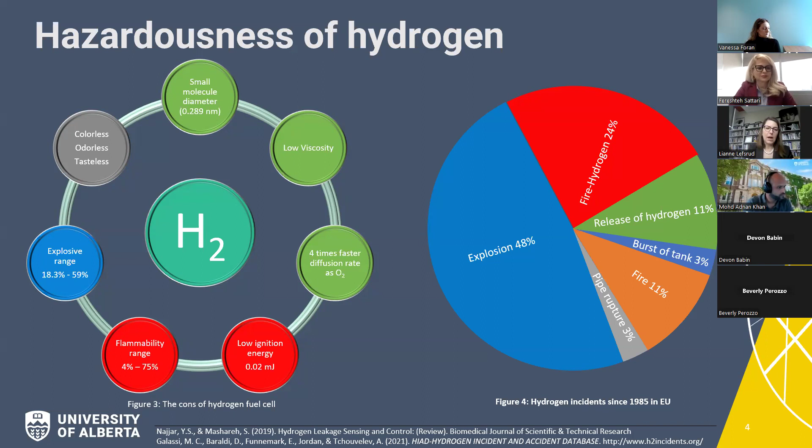As a result of this, figure 4 on the right-hand side shows there's been a number of hydrogen incidents in the EU since 1985: primarily explosion at 48%, fire at 24%, release at 11%, burst of a tank at 3%, and then also pipe rupture and regular fires. So it's highly hazardous, and as a result has led to a series of incidents. Next slide, please.

So what we'd like to talk about today is our approach generally, which is to look at the CSA Standards Council of Canada, identify the gaps, but how can we prioritize those gaps? Primarily, it's to look at the safety, process safety issues with regards to hydrogen, using a quantitative risk assessment for specific use case scenarios to determine where those gaps exist, and compare against municipalities' codes and standards versus other jurisdictions - California, Japan, other places where they've been using hydrogen for a number of years in a way that is safe and effective - so that we can enshrine a safety-first approach in Alberta.

We'll talk about hydrogen refueling stations as our first use case example, and we'll talk about some next steps. Next slide, please.

Okay, so what we did is basically follow the molecule to analyze these use cases, looking very much at the full hydrogen value chain. In this Alberta Innovates funded research, we have basically 5 milestones or sub-projects that we're looking at.

The first is hydrogen vehicle fueling and servicing, in which Anirudha will show our approach. Number 2 is transportation, primarily on roads and pipelines, which is also the third milestone. We're also going to look at microgeneration, and then lastly, end use in various residential, commercial, heavy equipment, and power generation.

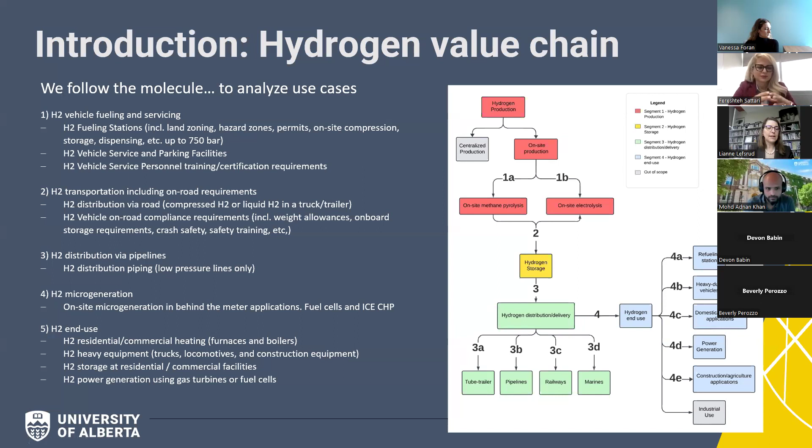Okay, next slide, please. Now I'll pass it over to Dr. Fereshteh Sattari, and she'll talk about our first use case in hydrogen refueling stations. Yes, thank you, Dr. Lianne. First, I want to thank everybody for taking the time and joining us.

Now I'm talking about the motivation behind this research. To support the transition to hydrogen-powered heavy-duty vehicles, the government of Alberta has called for expressions of interest from stakeholders and local parties willing to own and operate hydrogen refueling stations in the province. The expected station capacity is around 2 tons of hydrogen per day, primarily focusing on serving heavy-duty vehicles. However, these stations may also have future provisions for fueling light-duty hydrogen vehicles. To facilitate the deployment of hydrogen-powered heavy-duty vehicles, it is crucial to establish a robust hydrogen refueling network across the province. Next slide, please.

While deploying hydrogen refueling stations offers environmental benefits, several obstacles impede their facilitation in Alberta. These obstacles stem from various safety concerns regarding using hydrogen as a fuel, gaps in local zoning laws, Canadian codes and standards, and the process for permitting and approval considering these safety concerns. Additionally, most quantitative risk assessments performed for hydrogen refueling stations assume a uniform leak size distribution throughout the facility, which can lead to an over or underestimation of required separation distances.

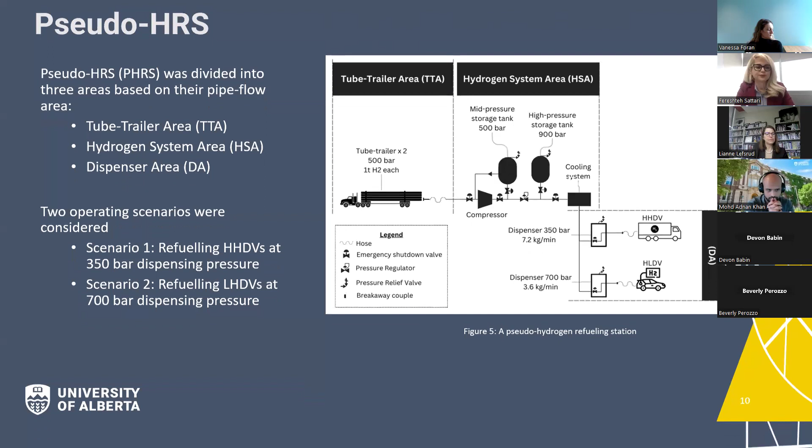Now let's talk about the facility description. This slide provides a detailed description of the equipment, pressures, and hydrogen inventories considered in these two operating scenarios for the modeled pseudo HRS. In scenario 1, for refueling heavy-duty vehicles at 350 bar, the facility included two tube trailers with a pressure of 500 bar and an inventory of 1,000 kg each, a compressor operating at 520 bar, a medium pressure storage tank at 520 bar with a 500 kg inventory, and a dispenser at 350 bar.

In scenario 2, for refueling light-duty vehicles at 700 bar, the facility had the same two tube trailers with a pressure of 500 bar and an inventory of 1,000 kg each. However, the compressor operated at a higher pressure of 900 bar, and there was a high pressure storage tank at 900 bar with a 1,000 kg inventory. The dispenser in this scenario was rated for 700 bar.

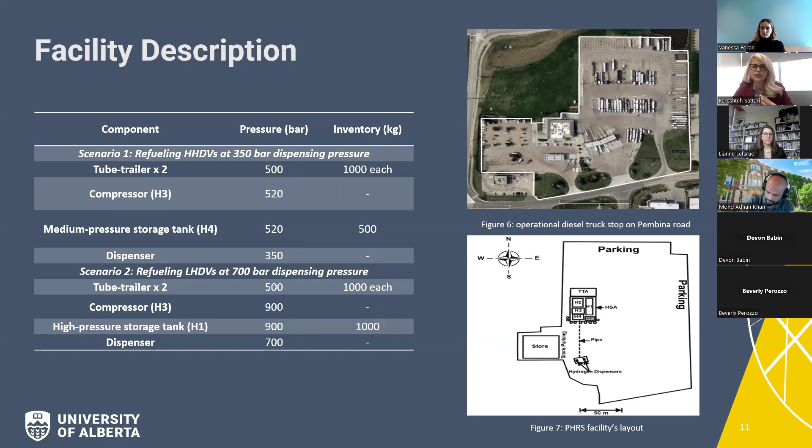Now let's talk about the methodology that we took for this research.

The quantitative risk assessment methodology followed in this study was based on the conventional approach outlined in the Purple Book, integrated with the risk-informed method of evaluating separation distances as described in the work done by Sandia National Lab and NFPA. For each area in PHRS, namely the tube trailer area, the hydrogen system area, and dispenser area, individual equipment failure frequencies were calculated using HyRAM tool.

A bow tie analysis was then conducted to evaluate the frequency of leak occurrence, followed by an assessment for the potential consequences of these leaks.

A risk matrix following the guidelines provided by the Center for Chemical Process Safety, or CCPS, was developed to assess the severity of the consequences. This matrix categorized a risk as intolerable, not desirable, conditionally acceptable with controls, or tolerable based on the frequency and consequence severity.

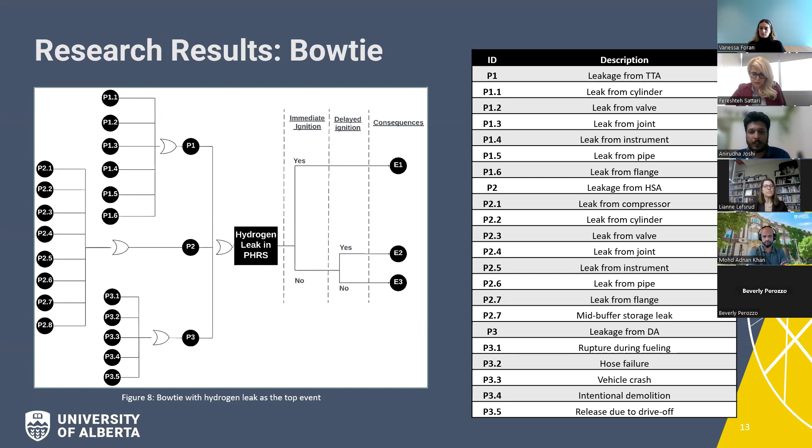Similarly, if there's a delayed ignition in the process, the consequence can be a flash fire. And in any situation, if there's no ignition at all, the consequence can be a safe dispersion, meaning the hydrogen has diluted and there's no probability of ignition in such events.

Next slide, please. Based upon these bow ties, we calculated what can be the frequency of occurrence of hydrogen leak in such situations. As Dr. Sattari said, we moved away from the assumption of uniform leak sizing throughout the refilling station. So we looked at different leak sizes at different areas based upon their pipe flow areas associated to each area.

We have 0.1%, 1%, 10%, and 100% leak sizes, relative to the pipe flow area associated with each component of the refilling station. Based upon these leak sizes, we evaluated the frequency of that top event occurring, the frequency of consequence E1, that is jet fire, consequence E2, flash fire, and consequence E3, that is safe dispersion.

Based upon this, we could see that the annual frequency of occurrence for a leak size of 1% and 10% had a relatively smaller difference of just 0.02. This is very considerable, because if we consider a 1% leak size, which is smaller compared to 10% and 100%, then we'd be underestimating the harm caused by a 10% leak size. For example, a 1% leak size is around 0.62 mm, whereas a 10% leak size is around 3 mm, and the 3 mm leak hole can generate higher harm distances compared to the smaller size.

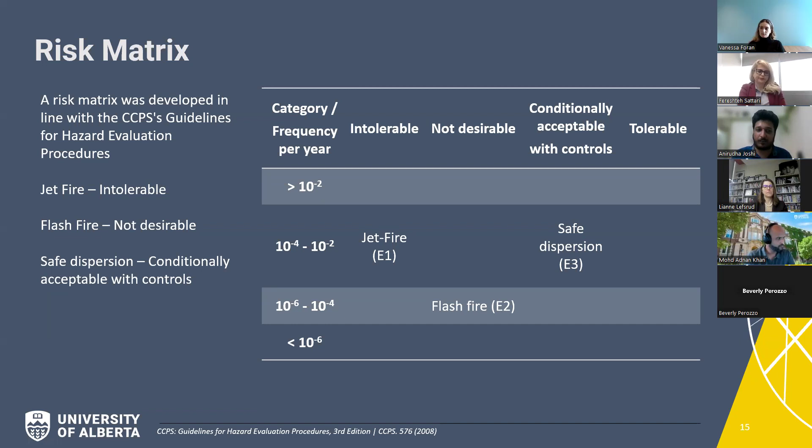Based upon this risk matrix and the different leak sizes evaluated, we had to set certain harm and risk criteria so we could estimate distances based on threshold levels. In cases with ignition, we look at thermal radiation levels developed. The primary one is 1.6 kilowatt per meter square, and at this thermal radiation level there's generally no harm even for longer exposures.

But at the 4.7 kilowatt per meter square thermal radiation level, if any individual is exposed for about 20 seconds, that human can experience first degree burns. Similarly, at a higher radiation of 25 kilowatt per meter square, a human can experience significant injury in just 10 seconds and even 100% lethality in a minute. Looking at these thermal levels, we concluded that 4.7 kilowatt per meter square is the particular threshold we need to look at, because that provides a 20-second escape time as well.

So any human beyond this will be in the thermal radiation range from 1.6 to 4.7, which is considered less harmful or at a stage no harmful. Therefore 4.7 kilowatt per meter square was our ideal threshold value to consider as the criteria.

Apart from the thermal radiation level, if there's no ignition, the hydrogen will keep accumulating and the concentration can reach about 4 volume %, which is the lower flammability limit of hydrogen. Even in this case, if an ignition source is present, it can ignite and result in flash fire due to delayed ignition. So we set these two boundary conditions to determine at what distances humans are going to be safe: the first is 4.7 kilowatt per meter square, and the second is the LFL concentration. Whichever generated the higher distances, we considered those as the separation distances.

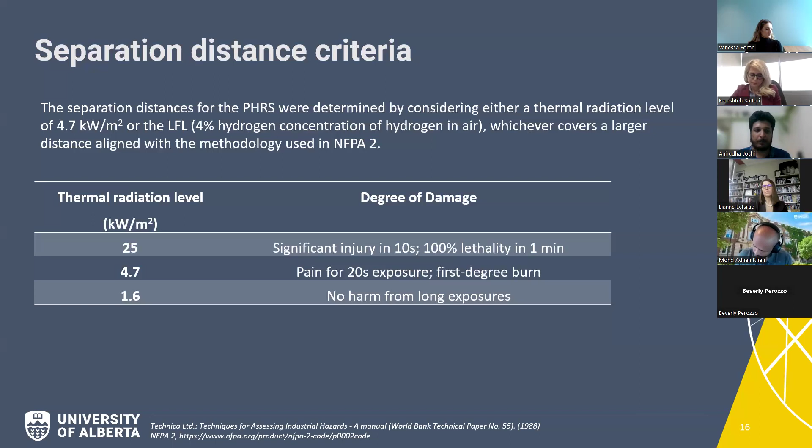Okay, so now we have the frequency part understood already. Now let's talk about the consequences that these leaks have. So as Dr. Sattari described, we have two scenarios.

Scenario 1 talks about the 350 bar refueling station wherein we are refueling heavy duty vehicles, and scenario 2 is 700 bar wherein we are refueling light duty vehicles.

Based upon the boundary conditions we set, in the first scenario for jet fire, the dispenser area has the highest harm distance, near about 30 meters. If we look at the LFL cloud, that is the 4 volume % concentration of hydrogen reaching, that is highest for the tube trailer area. The particular reason for this is higher pipe flow area as well as higher inventory of hydrogen present in the tube trailer area.

Now, the assumption of having a uniform leak size would have probably gotten us different results. Either the hydrogen storage area would have the higher distances, or maybe the dispenser island would have had the higher distances. But in this case, since we are looking at the relative pipe flow area, the tube trailer area causes higher distances in this scenario. So it was important for us to differentiate these areas based upon what pipe system or pipe sizing they have. Secondly, we talk about the second scenario.

As we can see, there's a drastic rise in the dispenser area, especially for the jet fire scenario, wherein the thermal radiation level can reach up to 40 meters from the risk source. The primary reason for this is that whenever we are refueling hydrogen at 700 bars, since we are going to compress it to that notably higher pressure, we need to cool it down to minus 40 degrees Celsius.

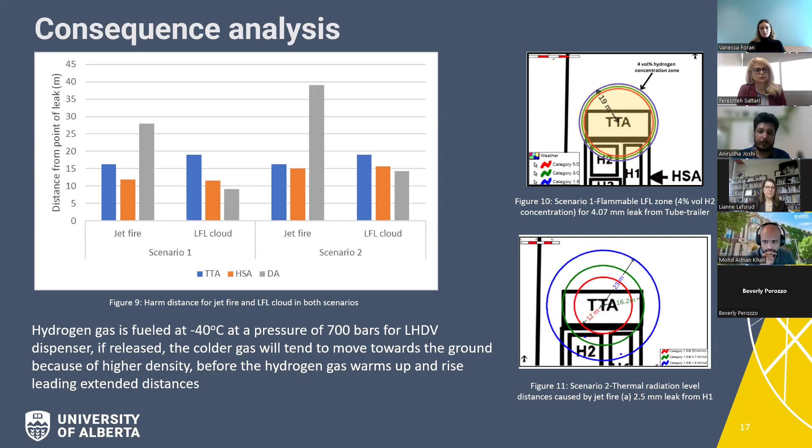So now, in order to quantify and put a number to the risk based upon the frequency and the consequences we have calculated, we estimated the individual risk for both scenarios. This is crucial to understand what human being, in what position or location in this hydrogen refilling station, is exposed to what levels of risk. That gives us an idea whether they are in the tolerable region or in a region which is highly risky, a high risk zone.

So in this case, the workers engaged in the unloading region, let's say if a tube trailer has arrived and workers are going to unload that hydrogen in the hydrogen storage area, those people as well as the maintenance operators operating in the hydrogen storage area are all exposed to a tolerable individual risk of 10 to the power minus 5 fatalities per year.

And the humans in proximity to the hydrogen storage area, within the retailer shop present in the particular refilling station, and the ones near the dispenser area, are exposed to an individual risk of 10 to the power minus 6 fatalities per year.

Now, there's a particular difference in scenario 1 and scenario 2. If you can see in the right side figure, the contours are concentrating more towards the dispenser area. The particular reason for this is the higher harm distances that are getting caused in the dispenser area. As we saw in the previous slide, the distances went up to 40 meters, the highest noted up till now for this particular region.

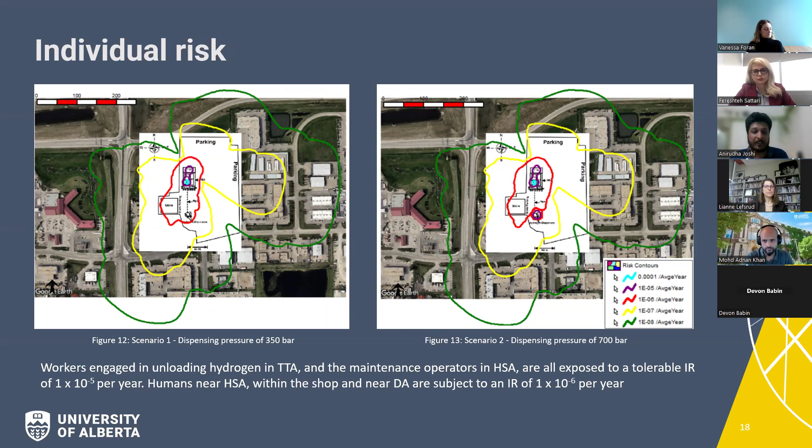And therefore, we can see the risk contour there is highly concentrated, and the value increases from 10 to the power minus 6 to 10 to the power minus 5. So that is where precautions need to be made. Next slide, please.

Okay, so based upon the separation distance criteria set as well as the boundary conditions we have, the separation distances were estimated as we discussed previously, whichever was higher was considered. As we can see, the tube trailer area in both scenarios has a recommended separation distance of near about 19 meters. So humans beyond this distance are exposed to risks that are tolerable, and people will have sufficient time to escape, resulting in absolutely no harm in any hazardous scenario.

Similarly, in the first scenario, the hydrogen storage area has a recommended separation distance of near about 12 meters. And for the dispenser area, the recommended distance is near about 28 meters.

This is dependent upon either the thermal radiation level being higher or the LFL zone reaching a higher distance, whichever is higher has been selected. In the second scenario, the tube trailer area remains the same, 19 meters. For hydrogen storage area, of course, we have increasing pressures. We have compressors operating at 900 bars, and the higher pressure storage tank is maintained at that higher bar pressure. So therefore, the distance has slightly increased from 12 meters in the first scenario to 16 meters in the second scenario. And the dispenser area in the second scenario experiences the highest separation distance, that is 39.1 meters in this scenario.

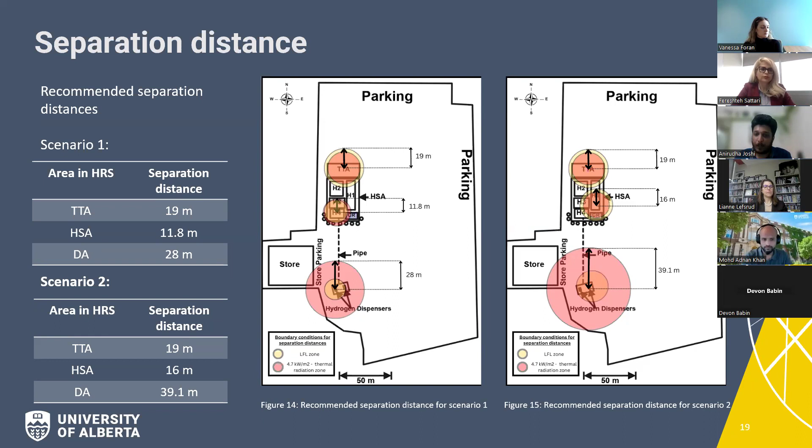Next slide, please. So now, in order to mitigate or reduce these risks, we looked at certain safety barriers, and based upon their probabilities of failure on demand, based upon the historical evidence we have and the literature available, we chose 3 relevant safety barriers: the gas detection system, the automatic shutdown system, and the emergency ventilation.

The process behind this is basically, if there's a leak in any area, the gas detection system is supposed to detect it immediately. Based upon the detection, it should trigger the automatic shutdown system. The entire electric supply to the HSA, as well as the inventory being supplied to the dispenser area and the HSA, should stop immediately. And there should be certain provision for that particular hydrogen if it has already leaked. And if there's a certain level of accumulation, it should be urgently ventilated. So there's a provision for emergency ventilation.

So based upon whether these 3 safety barriers work properly, or they are successful, or they fail to work, we have the conditions for ignition. Let's say if the detection system, the automatic shutdown system, and the emergency ventilation all fail at the same time, what would be the consequence? What would be the frequency of consequence we'll be looking at? Secondly, if one of them fails or one of them is successful, what are the frequencies of consequences we are looking at? This entire event tree was based upon the probability of failure on demand and the probability of immediate and delayed ignition for hydrogen.

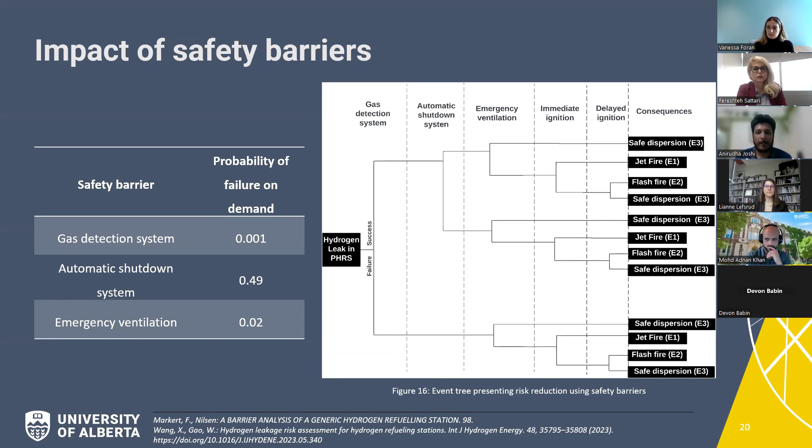Both of these, if we try to put them again in the risk matrix, we can see now these are somewhere in the levels of conditionally acceptable or tolerable. So somewhere we have successfully tried to reduce the risks in this process, so that the feasibility of the project increases, and we can have more and more inventory in such situations. Of course, these safety barriers are open to recommendations. There are a few more barriers we can implement, let's say a firewall, or thermally activated pressure relief devices, that can be brought into the picture to reduce these events much more. Next slide, please.

Coming to the recommendation parts, based upon the safety barriers we have, we recommend that the hydrogen detection system should be of the capacity that even if there's a small leak, and let's say there's 1% volume percent of hydrogen accumulated in the air, the hydrogen detection system should activate an audible alarm and trigger the automatic shutdown system. This will immediately stop the supply to the entire station. This is particularly because we don't want hydrogen to reach the lower flammability limit in the air, so that we'll avoid any potential ignition scenario in this situation.

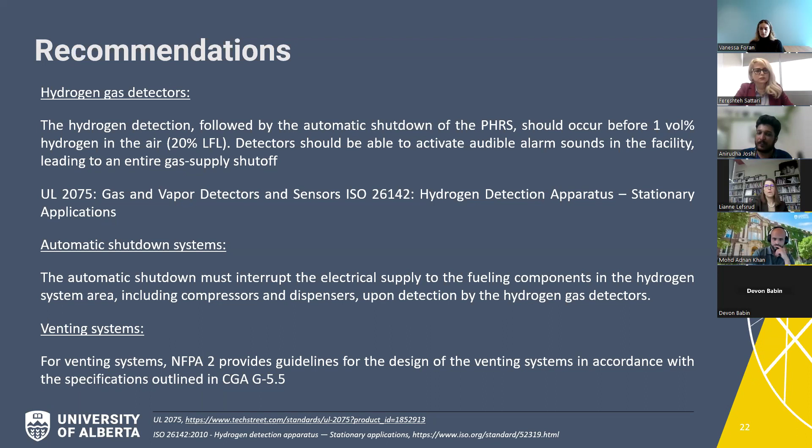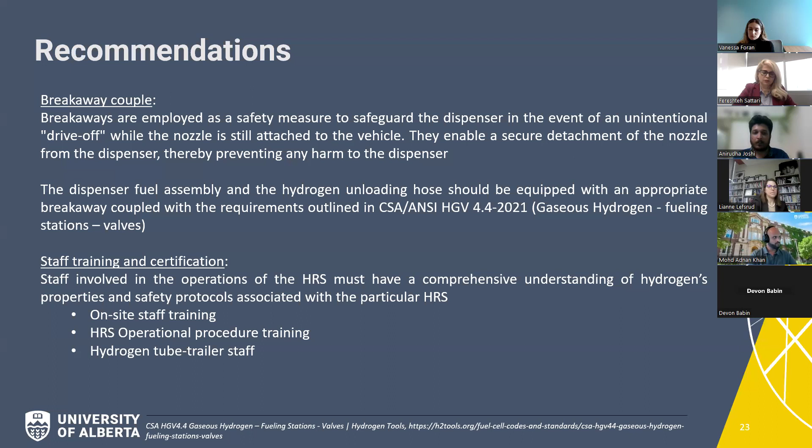And ultimately, if there's a failure of any of the safety barriers, the study also recommends having certain emergency push buttons that can be manually pushed by the staff present on site in order to stop the entire operation at the refilling station.

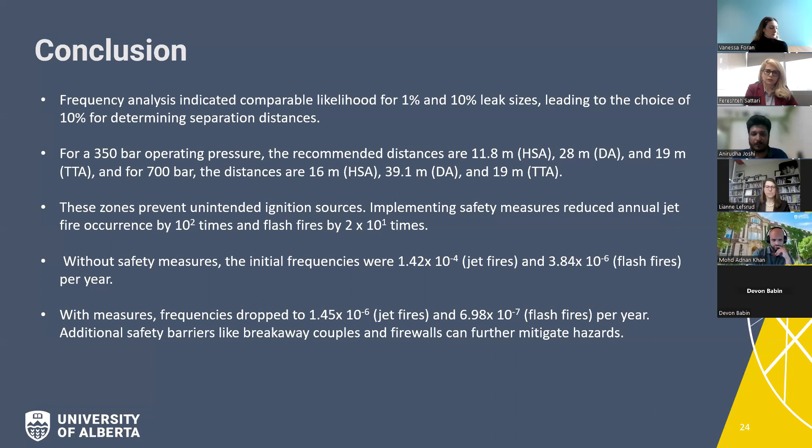So any comments or questions regarding the risk assessment part? I'll read out some of the questions, just being conscious of time. We may not be able to get to all of them, but we have a question: how did the authors confirm the accuracy of the data? Any experimental or other modeling or other techniques for risk assessment?

Yeah, so that's a good question. Initially we looked at the work that has already been carried out by Sandia National Laboratory, because we do not have much incident data for hydrogen since it is new in the fuel form right now. So there were certain Bayesian analyses conducted, and all of the frequency data was integrated based upon that Bayesian analysis. That is the basis for the development of the HyRAM tool that we initially talked about, which was used in the assessment.

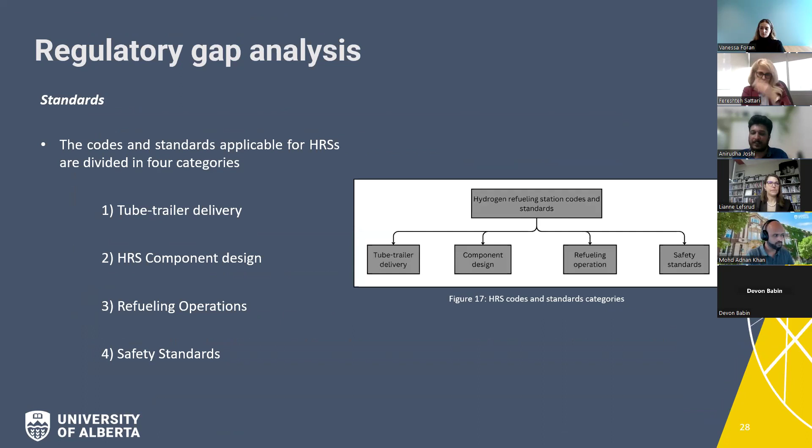To have a brief understanding of the regulatory gap, we try to divide the codes and standards for the hydrogen refilling station into four categories: the tube trailer delivery part, the component design part, the operations (refilling operations), and the fourth part is the safety standards already in place. Next slide, please.

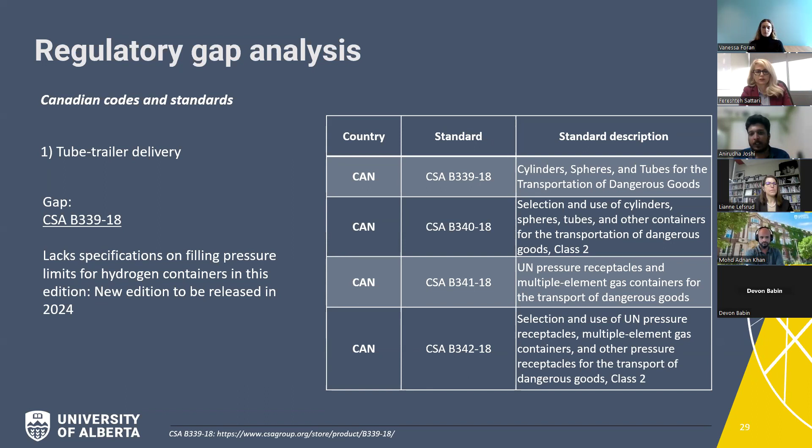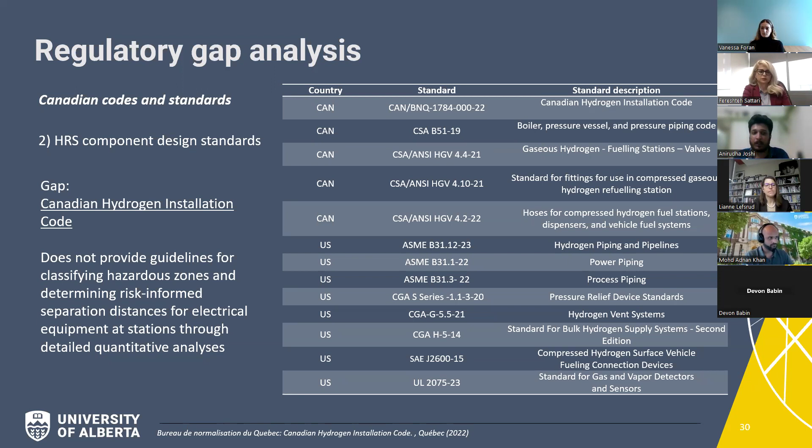Coming to the component design part, there's one established standard known as the Canadian Hydrogen Installation Code, established by the Quebec Board. This standard talks about separation distances but does not provide guidelines for classifying hazardous zones and determining risk-informed separation distance, especially for electrical equipment, because apart from the gaseous part, we have certain electrical equipment in place that we need to thoroughly look at, establishing certain boundaries from such highly sensitive equipment. So we recommend a detailed quantitative analysis. Also, recommendations from the Canadian Electrical Code Part 1 can be looked upon to bridge this gap.

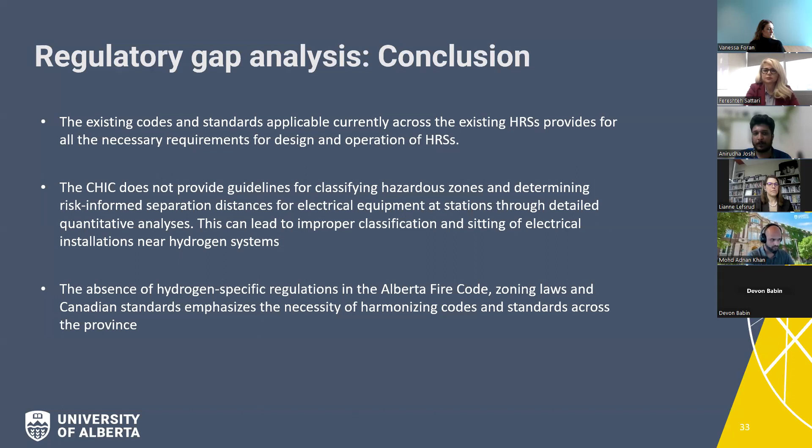To conclude, most of the codes and standards that we scanned, particularly for refilling stations currently being used, lead up to the design and operation requirements of refilling stations, but particularly looking at the zoning laws, the provincial fire code, and also the Canadian Hydrogen Installation Code, that can potentially be a guideline for all refilling stations built henceforth in Alberta. So these are the recommendations: we need to talk about risk zones and guidelines for classifying those zones, and also have specific regulations for hydrogen in the fire code, zoning laws, and the Canadian standard we talked about. Any comments or questions on this part?

We have a question: does the Canadian Hydrogen Installation Code talk about separation distance? Is that good to begin with?

Yeah, actually, the Canadian Hydrogen Installation Code has an appendix designated particularly for separation distances, based upon how much inventory of hydrogen we have. But that is just one part of it. We also need to look at what pressures we're dealing with, what pipe sizes we're dealing with, as we briefly described in the study, and that can probably take it to another level, talking about the technical part of hydrogen, not just based upon how much hydrogen we have on site. But yes, to answer your question, it does address the separation distance.

One more question: what is the heat flux of the fire? The heat flux is generated at different levels, and that is what we described through distances. The distances shown were for 4.7 kilowatts per meter squared, which was the set criteria. As we go up to 25 kilowatts per meter squared, of course the distances decrease. But that wasn't our point of concern at that point; we looked at the criteria that we set. Perfect, thank you.

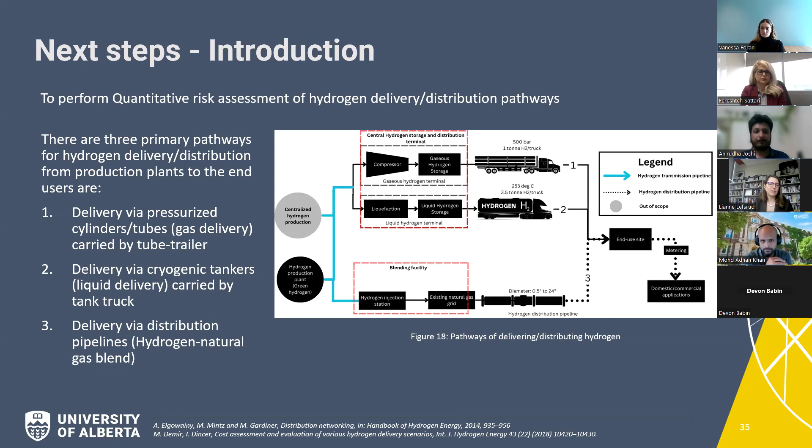So our methodology parallels what we did for the hydrogen refueling station. It really is looking at quantitative risk assessment methodology.

On the left is delivery distribution, specifically tube trucks, and on the right it also includes low distribution pipelines. So it's thinking about loading locations, travel routes, unloading locations, point of distribution, end of use site, and then process modeling, hazard identification, consequence and frequency analysis.

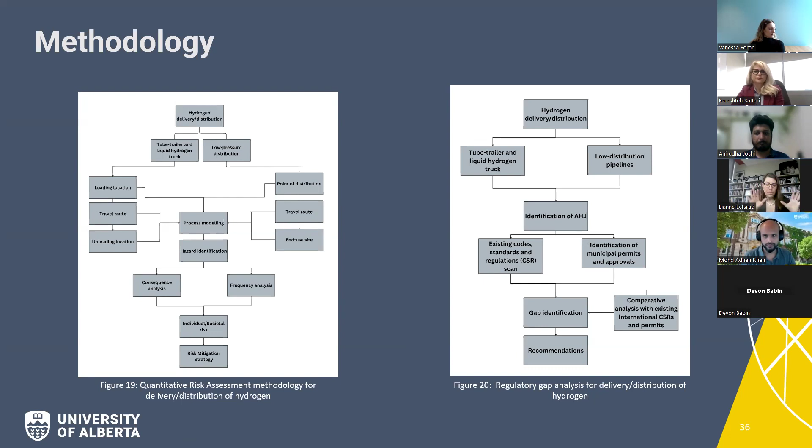Again, looking at individual and societal risk, and then risk mitigation strategies. Very parallel to what Anirudha discussed with regards to hydrogen refueling stations—the same procedure entirely, but looking at transportation and routing.

Next slide, please Vanessa. So again, our location of the central distribution terminal is Linde's Tube Filling Facility in Fort Saskatchewan on 119th Street. This location will be considered for risk assessment for the unloading scenario of the hydrogen into trucks for delivery.

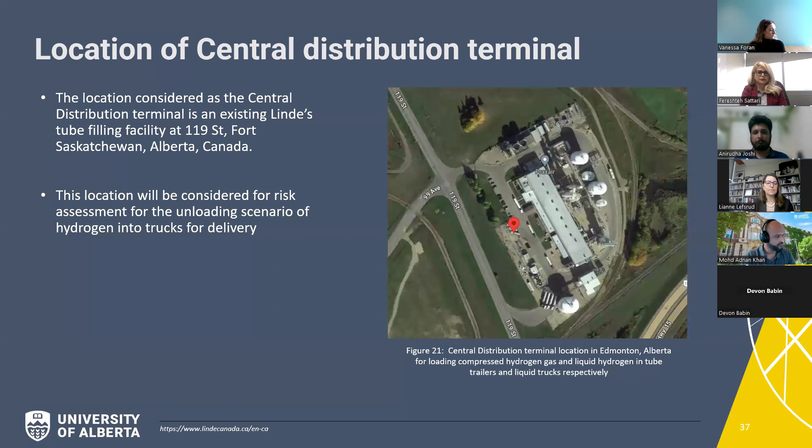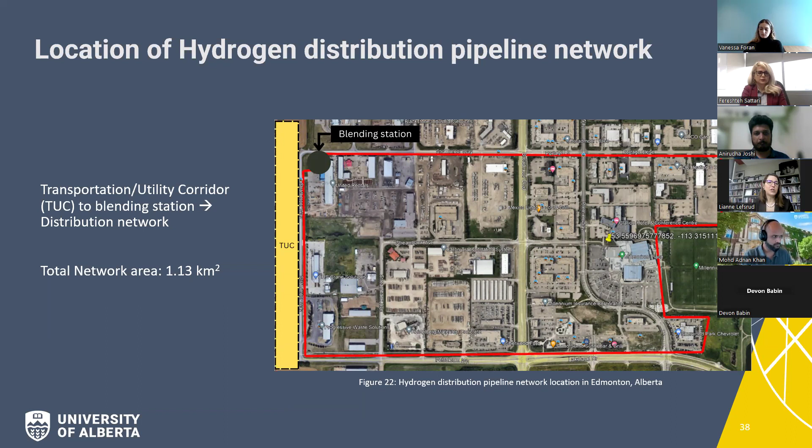Next slide please. Really, we're then looking at the transportation utility corridor to a blending station into the distribution network, and the total network area is 1.13 kilometers squared.

So that's it in terms of our overarching project—the motivation for it, our approach towards it, using our first milestone report with regards to hydrogen refueling stations. And the next step is looking at hydrogen distribution.